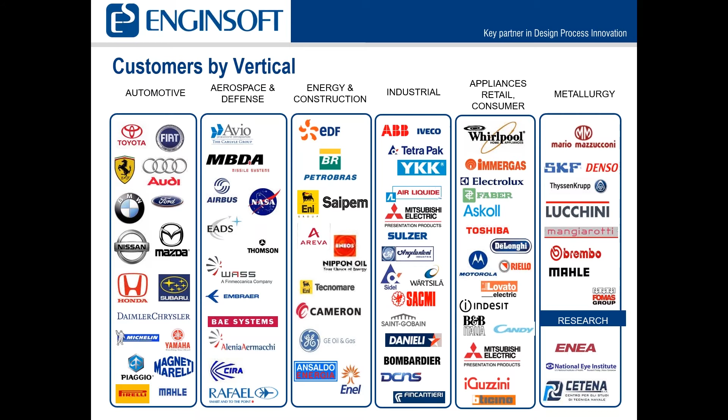So EnginSoft is an authorized reseller of Altair products. We are a reseller in the United States, but the company is a global company, and the US offices are based here in Dallas, but we have offices throughout Europe. The customers that EnginSoft typically works with are many of the company names that you will recognize throughout the world, although given the heavy focus in Europe, many of these are European-based, but quite a few of them are in the United States. You see a NASA logo on there and some others as well that are headquartered here. And this is because we focus exclusively on simulation, and this is one of the reasons that we have chosen to partner with Altair in the United States.

We do an extensive amount of consulting work. We have over 200 engineers and have completed over 4,000 projects over the 30 years that we've been in business. So there are not many areas of simulation that we are not familiar with. We do quite a bit with FEA, CFD, crash analysis, and of course, one of the leading areas that we're focused on is generative design and 3D printing.

We are, as I mentioned earlier, a software partner of Altair, but we have customers in over 1,500 locations. What that allows us to do is when we come and talk to one of our customers about a particular topic, in this case generative design, we're able to bring with us, with our engineers, expertise from where we have done work with other customers, what's worked, what hasn't.

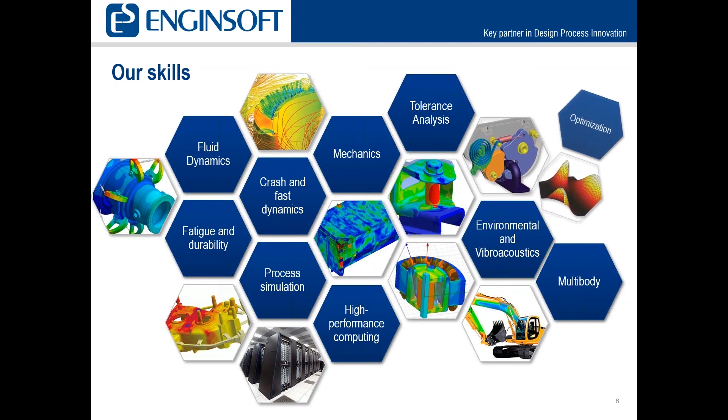So if we're going to be talking with you about the Altair products for generative design and topology optimization, we could easily reference the aerospace company in Colorado that we just helped recently, whose name I don't have permission to use, or the Department of Energy customer with Altair that we have recently done business with, or oil and gas. So it allows us to bring expertise with Altair products to specific use cases at our customer sites. Our skills are in a wide range of areas. We do quite a bit with fluid dynamics, FEA, multi-body and high-performance computing.

Okay, so about Altair and simulation-driven design for the topic of this webinar. I think Joe did a pretty good job of explaining what topology optimization is, but essentially, from my perspective, it's a series of mathematical rules, right? So it's an understanding of what mathematical rules apply to the effect that's governing the shape of the particular object, and that can be something that is intuitive, or it might be something that is completely different.

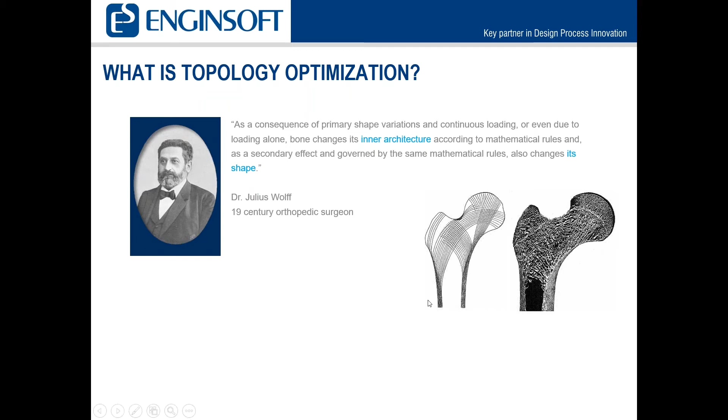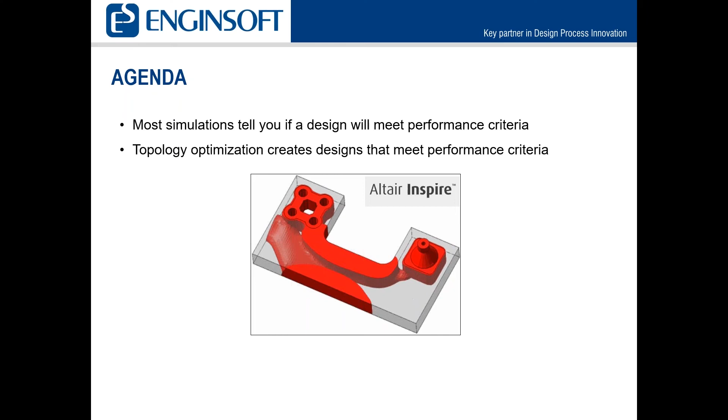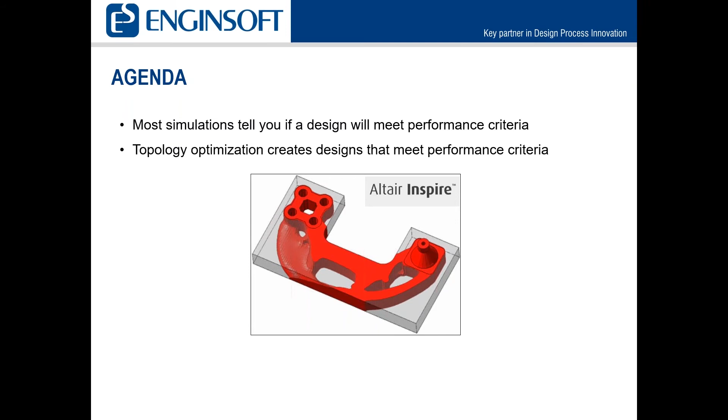So when we look at Altair Inspire, the topology optimization is really about creating designs that meet the specific performance criteria. Before, we would do a design, and then we would go test that design to see if it would meet whatever the criteria is, and we relied very heavily on the best estimate of an experienced engineer. Now, of course, the experience of an engineer is still highly valuable, but what topology optimization allows you to do is to treat the performance criteria as the primary objective and then create the shape accordingly, keeping in mind certain constraints that you may have. Okay.

Now, if you trace that back, some of you on the phone have been an engineer since the 80s and the 90s, right? And so, you did a lot with the 2D and the 3D. And of course, you were basically starting with some type of a design, and it was generally iterative from whatever your company was manufacturing. You're going to do the next version of it, and I might make a very slight change to a particular device, but I have to keep in mind my historical manufacturing methods and how I could alter that particular shape and still not impact the overall effectiveness of it.

As we got more into 3D CAD in the 2000s and 2010, we could do a lot more with the post-processing for simulation, but now we're getting into simulation-driven design. And Altair is at the leading edge of simulation-driven design. And what that means is that we are able to lead with simulation, because if you change in your thought process, I don't really care about what a product necessarily looks like unless I'm in the marketing department. What I care about is what are the functional characteristics of that product. How do I make sure that it performs the way that it should? That means I'm going to lead with simulation and then create products that meet that requirement.

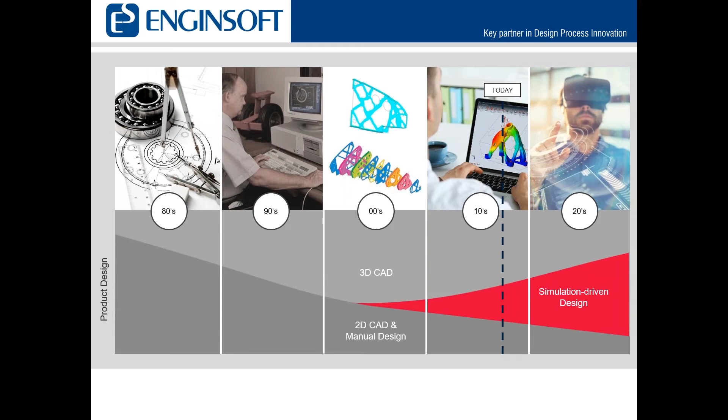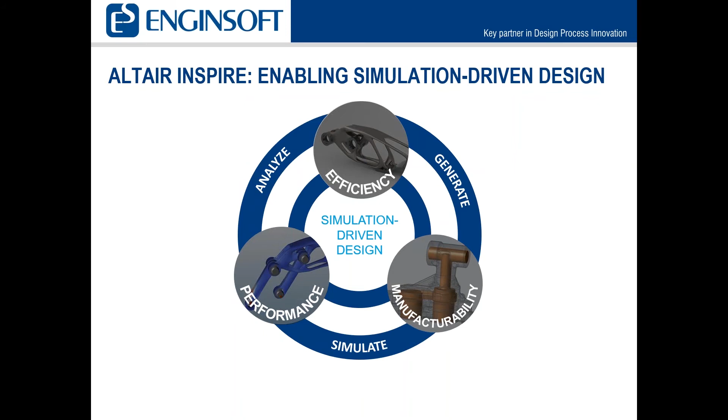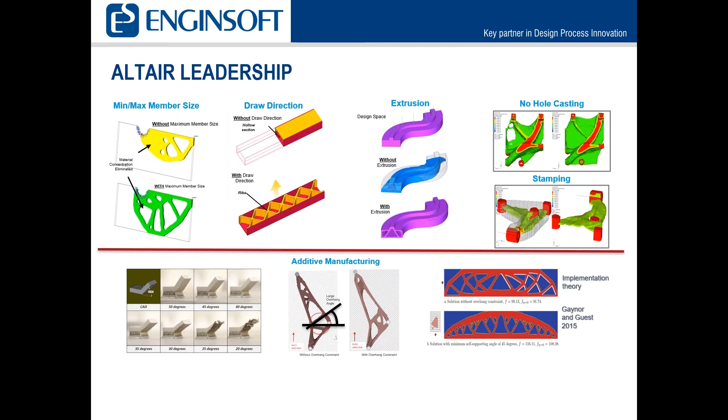So Altair has been enabling simulation-driven design as a company because they are heavily focused on the manufacturability. I know several of you that I've spoken to on the phone in preparation for this call, talking about manufacturability means that we're going to design something that we can actually manufacture, be that a 3D print, be it any of the other manufacturing techniques. Okay. Altair's leadership in the market is not just based on generative design, but also on the other product set and understanding where they're able to apply that technology. And so you've got some videos on the right showing that, okay, here's my generative design, but I'm going to take into account manufacturing methods in addition to the additive manufacturing.

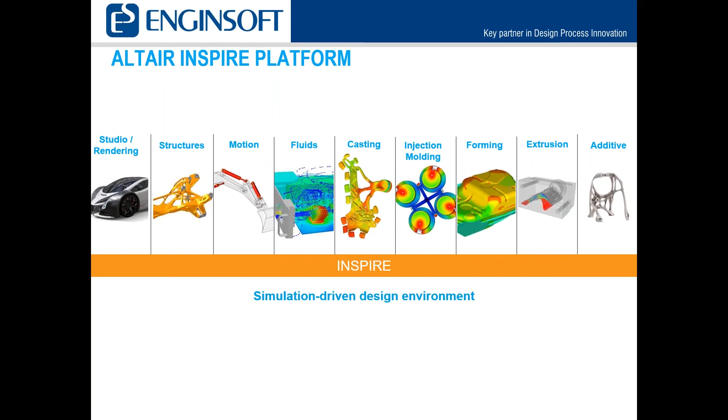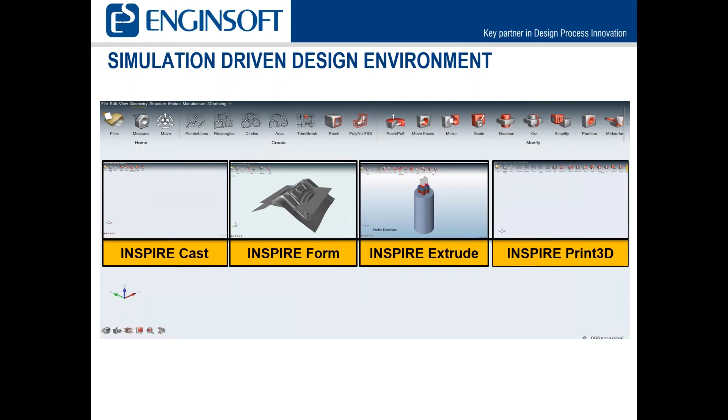But this is just one part of an overall suite of products where Altair is leading with simulation. And so we're going to allow for the other engineers on the phone to do a better job of doing a demonstration, particularly of the generative design products. But you have to keep in mind that these are part of an overall family. And that overall family, because of the licensing structure of Altair, you can have access to these other tools. For some of these people on the phone, this may be a bit unique, so I'll just go into it briefly. If you take a look at the interface with the Inspire line, you're able to access all of the different products here because the licensing model that they use is based on a unit-based license. So it's access to the suite.

Like a lot of software companies, you would just go buy one particular piece of software and you might use it for a couple of days this month and then next quarter use it for a couple of days. Think about this more in terms of you're going to get access to the suite of products and be able to have access to all of the different tools when you need them. And that's the advantage of the Altair system. I've got several people from Altair on the phone that are going to do the demonstration, so they might yell at me for this one, but think about it. Instead of buying Microsoft Excel and Microsoft Word separately, you bought the Office suite and you're using Word or Excel when you need to, right? And so I like to use that analogy here. Altair Inspire is providing a unit-based licensing that gets access to the suite, but is priced for value, okay?

And I believe that is my last slide. So with that, I am going to turn the presentation over and you guys are going to see some more details on the products in particular. Evan? Yep, I'm ready. You want to give me? Beautiful. Can everybody see my Inspire window here? Sure can. Awesome. So thanks, Joe and Chris, for the introduction.

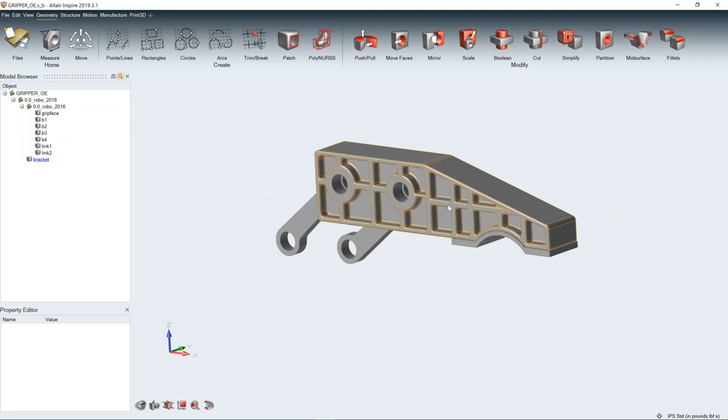So I'll go ahead and just open up a basic parasolid file, just some sort of dumb geometry, and then we'll walk through how to set this up for an optimization. You'll see here I've got a small assembly of 8 to 10 parts, something that might be a motion mechanism or something I could just simulate as a static analysis. So for the sake of this simulation, we'll just set it up as a static analysis.

And we'll want to change this shape, this piece here highlighted in yellow. This is going to be the shape that we're going to use the generative design or the topology optimization to change. So up at the top here, you'll see the structure of all of the Inspire tools, whether it's this one or any of the manufacturing tools, has this ribbon structure where I can click through different sort of workflows that are already built in for me.

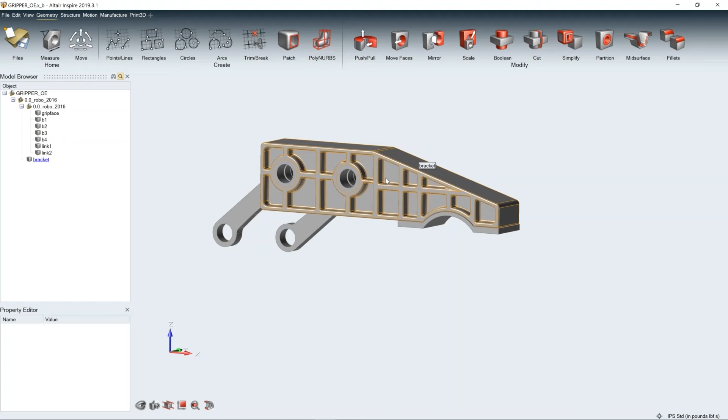So we'll start here with the geometry ribbon, and we'll start doing some simplification on this geometry to build it up for optimization. You want to give the solver an ample amount of package space, what we call design space, in Inspire to design. So I'm going to go ahead and use this simplify tool, and I want to fill in some of these holes and pockets that were cut out in this geometry. So I'll actually go ahead and isolate this part, so I'm just looking at the one that I want to simplify.

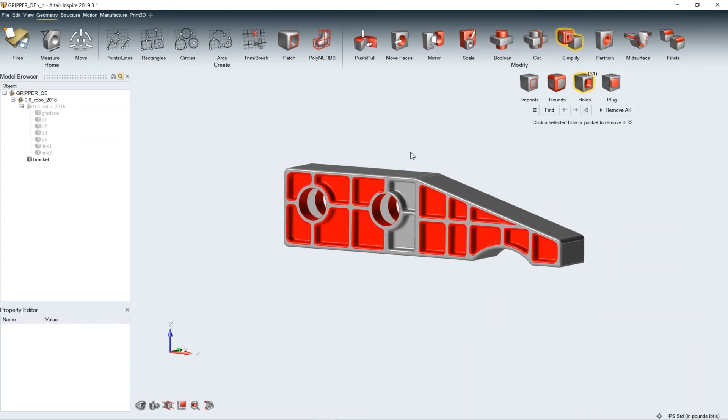And then I'm going to click holes, and it's going to automatically search for holes in this geometry that I can fill in. Inspire is really built around being intuitive and useful for designers and people that are familiar with CAD products, maybe not as familiar with analysis tools. You'll see here all the things that are highlighted in red, it'll fill in for me if I accept them, but it missed a couple of these little pockets in the middle for some reason.

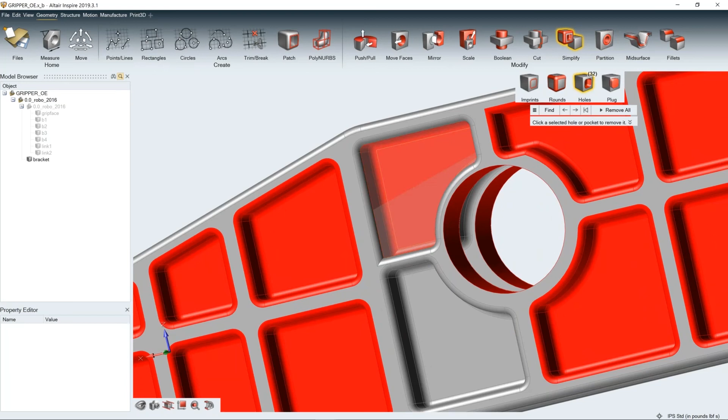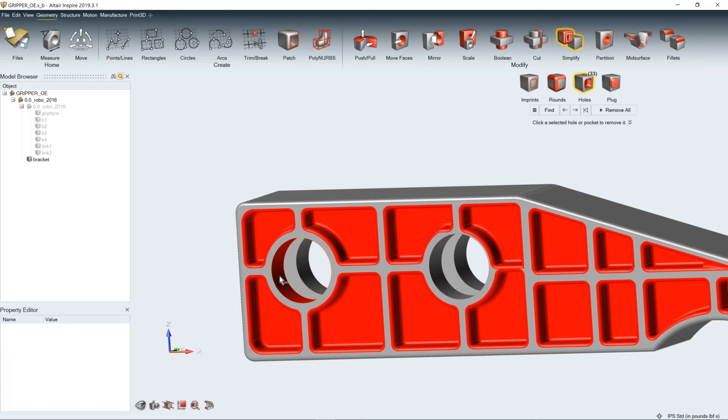So I can go ahead and just double click and grab some of those faces and fill them in on their own. And just add all the little fillets in as well. Make sure we get everything that we want to fill in and nothing that we don't. So it's really quick and intuitive just to click through and pick up the faces you want to remove. And then obviously these ones I want to keep where these bushings are. I'll just do a control select to get rid of those. So all the faces in red will get removed when I click remove all and filled in automatically.

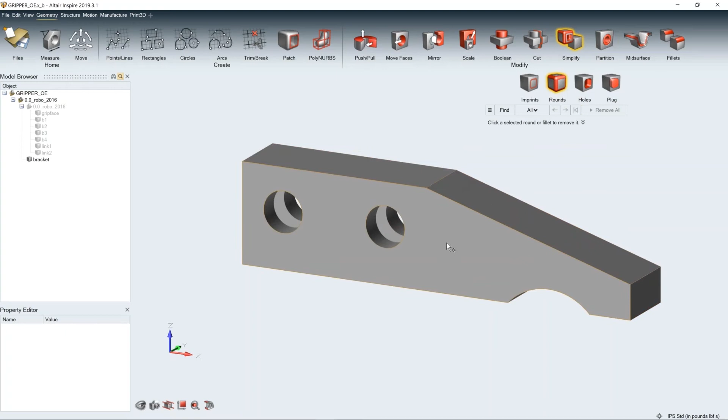Now I've got a much bigger package space, a really free design space for the optimization solver to work with. I can do the same thing with all the fillets and rounds in the model just to give square edges for a little extra space. Again, that's 2 clicks and it'll automatically remove all of the fillets. And then I could enter into a push and pull mode and maybe pull some of these faces out to give myself a little bit more geometry to work with as well while we're doing the optimization.

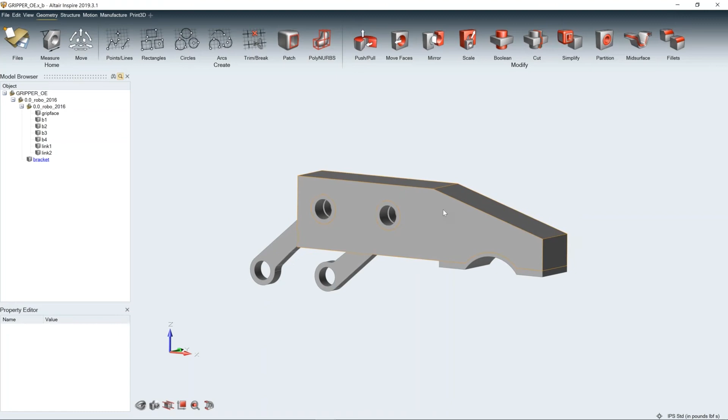So really quickly, that's the geometry tab and the workflow and some of the tools that we use pretty commonly to clean up geometry and prepare it for optimization. All I have to do is set this geometry as a design space, and it'll show up in this maroon purple color, and that's just telling the solver that that's the part I'm going to optimize when I click run. That's the geometry I want you to change.

So moving on, we'll actually set up the boundary conditions and the loads and constraints. So in the structures ribbon, everything is, again, working from left to right. So the workflow is really easy to follow and built in for you. And you'll see a lot of these tools highlight yellow in different areas as I hover over them. And that's so that we don't have to click through a bunch of menus to get to a specific tool we want. We just have to know exactly where to click. So really one click to apply a different boundary condition doesn't require me to click through a bunch of different menu files.

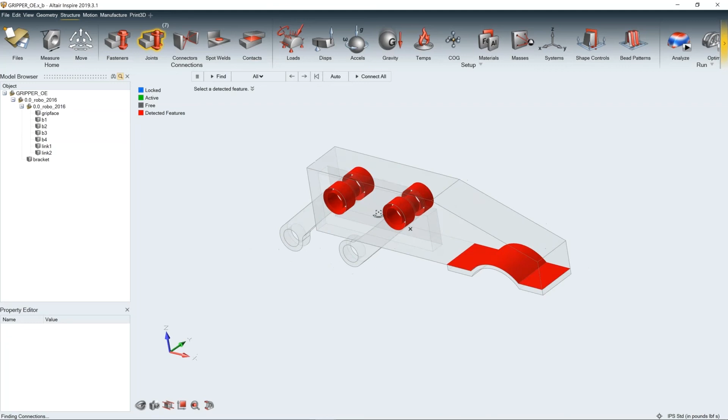So I'll go ahead and click the joints icon here because I have some joints that I want to add into this simulation. And you'll see again, it's automatically going to suggest some joints for me. And I can click to accept or I can go back and find them on my own. But what I'll do is just use the ones that it automatically finds, these concentric holes here in the middle, and automatically click to add a free pin. And I can do the same thing with this other hole. There's another free pin. I can change that condition as I see fit.

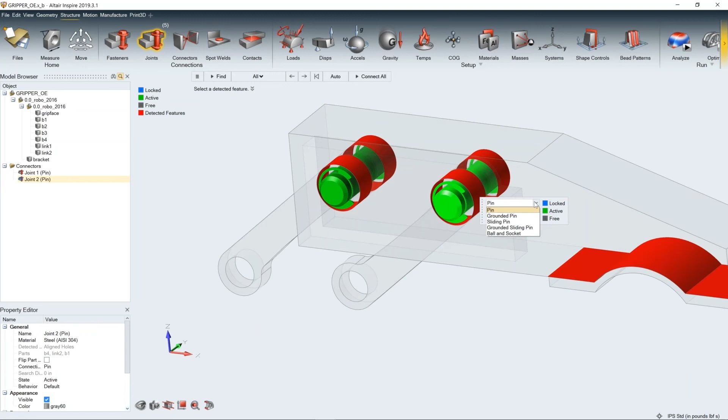I can also find my own. If it doesn't find a feature that I want to use, I can click this single hole down here at the bottom and add a grounded pin. Grounded pin will just act as a fixed point that will allow rotation, whereas these free pins are allowed to translate and rotate.

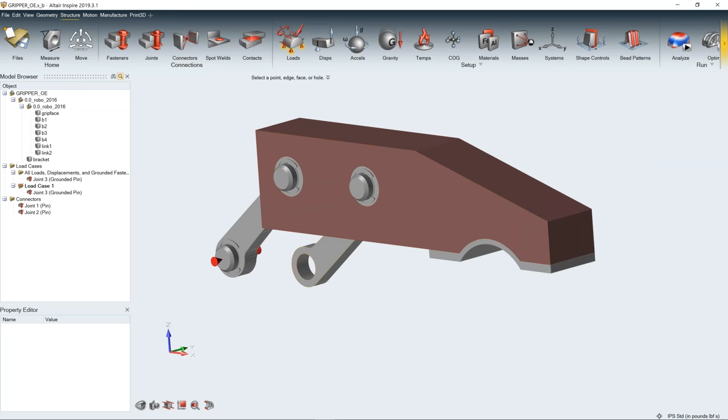I've got some boundary conditions set up. I'll go ahead and use this loads tool to apply some of my other boundary conditions that aren't joints. So I can click the apply a support icon and apply a support to any face, edge, or point on the model. And I'll just click this face here in this other joint so that we have a fully constrained model now. Now this is locked in rotation and translation, and then the other joints are allowed to rotate with the grounded pin being grounded.

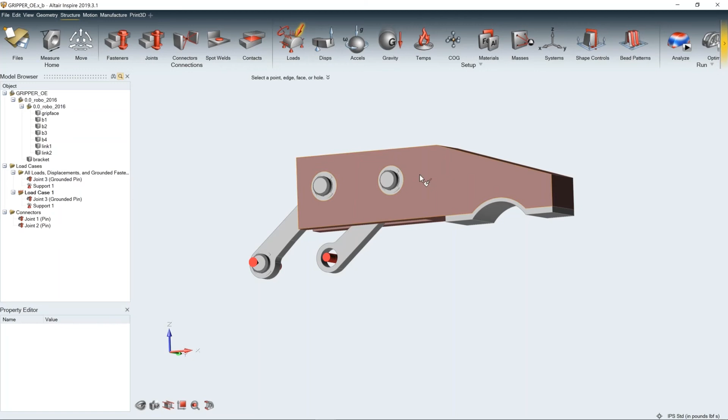Now we're ready to add some loads to actually drive the stress in the model that will drive the optimization shape. So I'll click this forces icon, which again is a part of this 4-part loads icon. I can click any face, point, or edge to add a force to, and you'll see the face that force is applied to highlighted in red. And these little micro dialogues pop up a lot in Inspire to really help you along the workflow as well.

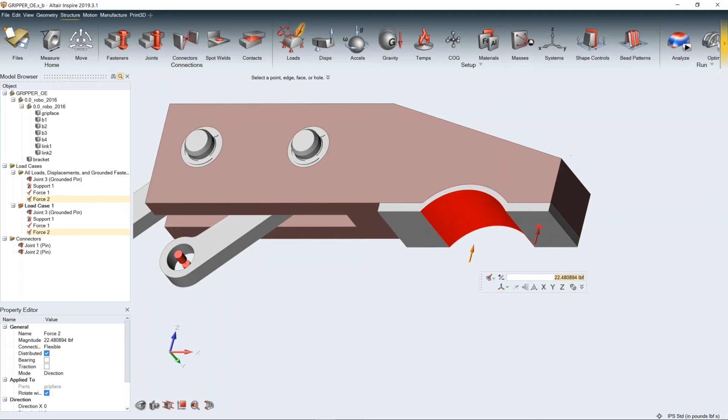So I can quickly align these with the X, Y, or Z axis, or I could even use a movable triad to rotate in a certain direction that I want. And I can really quickly type in any unit system into here, and it'll convert to pounds. If I'm not working in pounds, or I know my measurement in a different unit, I can just convert it right there. We can quickly apply loads and torques and pressures and things like that to any face, edge, or point along the model.

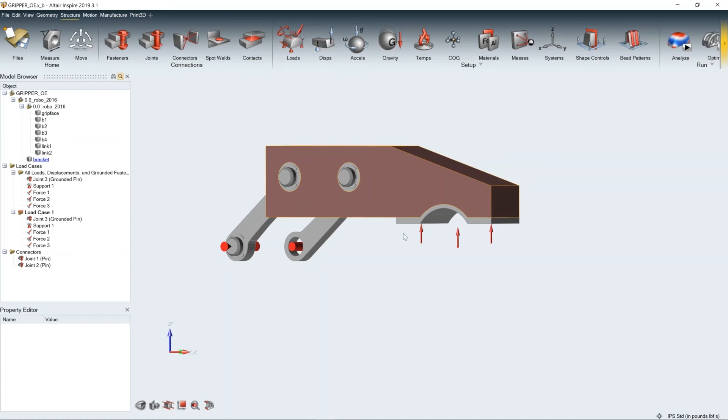Now I'm all set up with a fully constrained and a loaded model. And there's tons of different capability within this Inspire tool for how to load and constrain your model. So it's not just limited to these basic constraints that we just added. But for the sake of time, these are the easiest to show off, and I think the most intuitive.

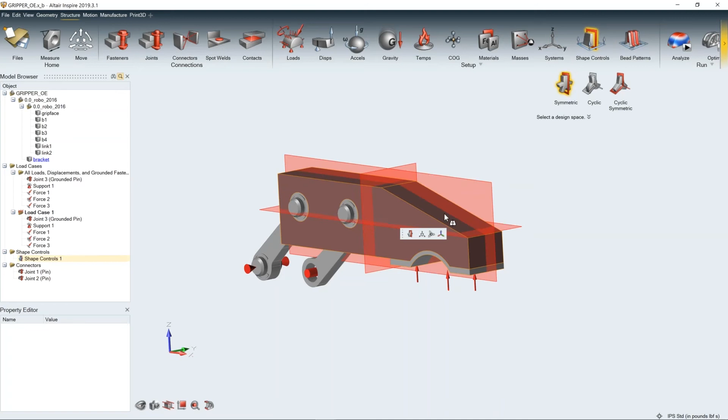One of the most important things about Inspire and its workflow for design for manufacturing is this shape controls button. So I can quickly add these shape controls to this design space. What this is going to do is actually tell the solver how I want this shape to look at the end of the run. So these are symmetry planes, for example, and I could say turn off these two because I know I want this part to be symmetric about this plane. And that'll drive the solver to make this part symmetric about that plane.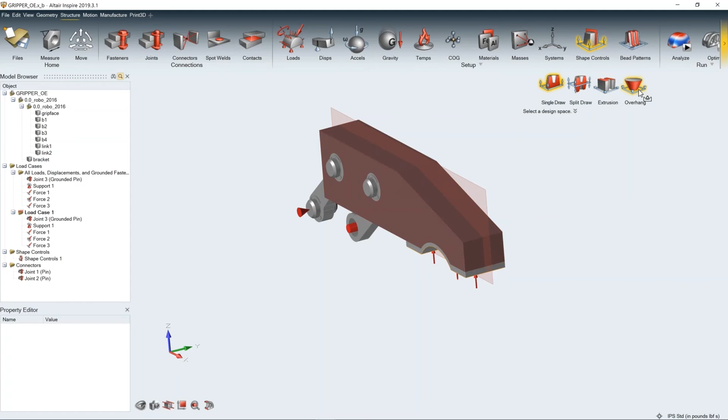Or I can use these manufacturing shape controls, to say I know how I'm going to manufacture this part, so I want you to optimize it with that in mind. And the one we'll show off here is this overhang constraint. An overhang constraint is going to say I'm going to print this part in a certain direction, and I want you to optimize the overhang angle in that direction.

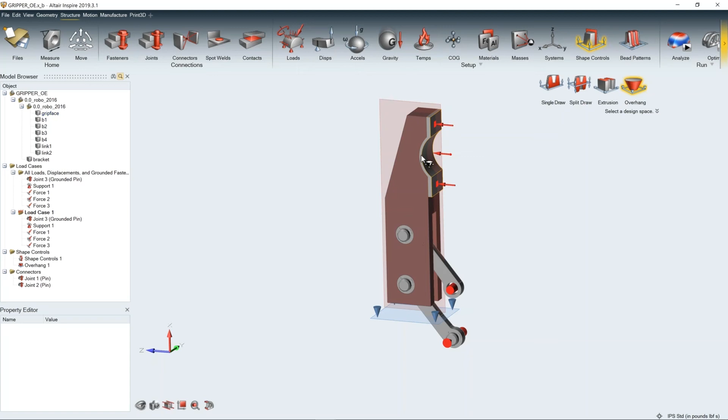So for example, if I were going to print it here in this orientation, and I know my printer can't handle anything under a 45-degree overhang angle, now the optimization is going to give me a shape that can be printed with the minimum amount of support structure in this direction. So it'll optimize for print time and support structure volume once you're done with the post cleanup at the end. And we also have these for a split draw or single draw for a casting or molding, or an extrusion as well for a two-dimensional profile.

And now we're all set up for an optimization, and we can just go over to the tool here and press run. We can set a different objective, or set a different volume we want at the end, or we can actually set a stress target as well if we want to do a minimized mass run.

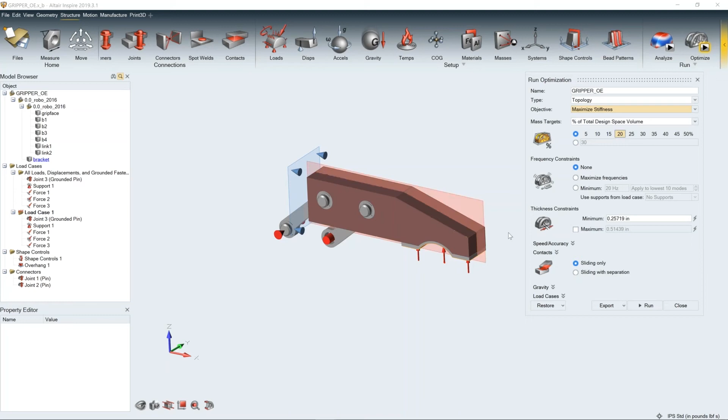So there's tons of different objectives in here, and we could talk about the different types of optimization until we're blue in the face, but for the purposes of today, what we'll run is a maximized stiffness run, which is going to give me the stiffest possible result with only 20% of the volume remaining of this purple shape. That's the run we'll take a look at in the next model, and then I'll pass it off to Sean.

So here's the result of that run we just set up. This is the exact same model, just already ran in the background, and it took about 15 or 20 minutes to finish. So you'll see here, this is what your standard topology optimization design would look like. A little bit rough around the edges, due to the process of removing elements and element densities.

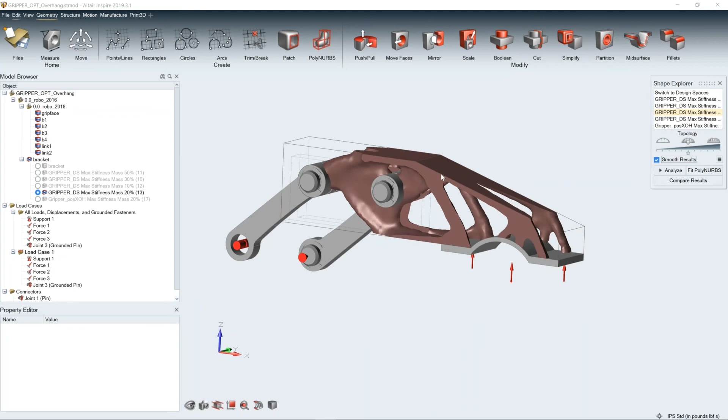But we've added some features in Inspire to smooth these shapes out so you can export them, and they look a lot cleaner. So you see there, I'm just toggling on the smooth results button. And then one of the really interesting parts about Inspire in this post-processing world is this PolyNURBS button.

PolyNURBS is going to allow us to take that transition to a detailed design from a result. So I can use the PolyNURBS tool and all of the tools underneath this taskbar to wrap this geometry in a clean solid.

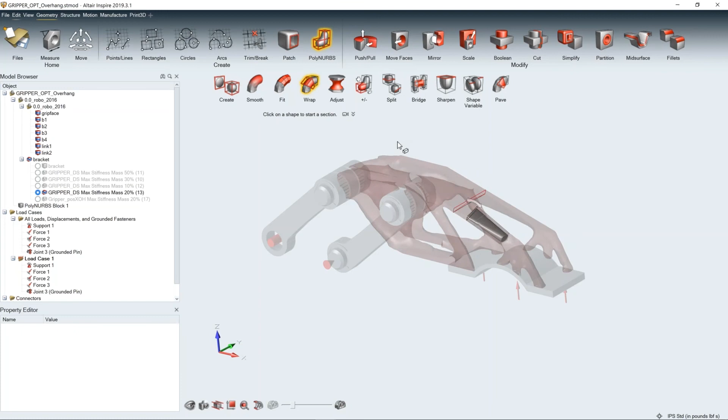For example, I can just click between faces and wrap this geometry all around, or I can build it piece by piece. I can build on top of a face in a certain direction. And I can also snap and move any point, edge, or face in this model and build it like almost a clay model.

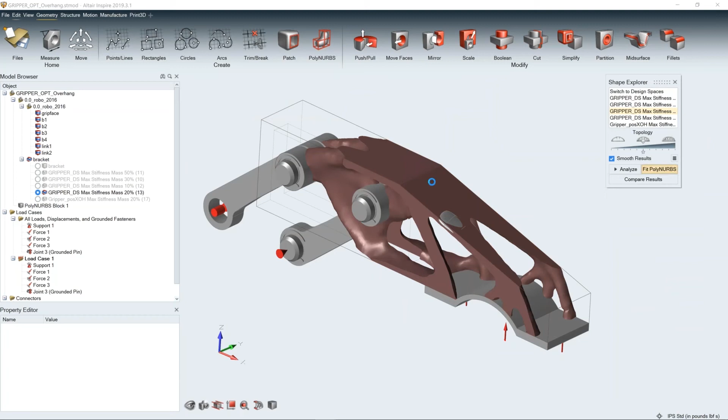But in addition to that, we've added in the new versions what we call PolyNURBS Fit, and that's going to automatically wrap this shape in a PolyNURBS. You'll see it follows the underlying geometry, so it's a little bit more broken and less smooth than if you built it on your own.

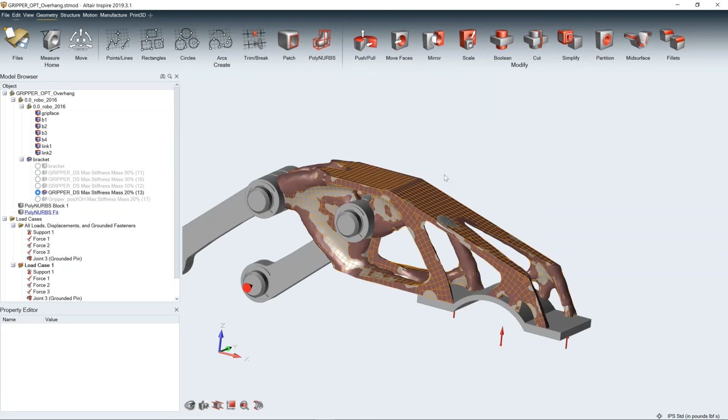But what you get out of this is a watertight solid that you can take into any other tool - it could be a print simulation, or take the Parasolid file right out into a printer to set it up for your manufacturing simulation. So you've actually got a watertight solid in 2 clicks of your optimization result, and you can do with it what you wish and edit this with our PolyNURBS tool as well.

That was a quick walkthrough of optimization and post-processing, and I'll pass this result on to Sean for 3D print simulation. All right, great. Thanks, Evan. Appreciate you going through that.

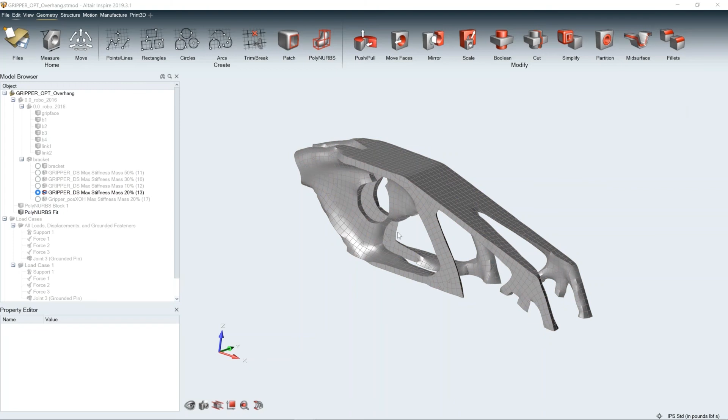While you're passing that over to Sean, there's a quick question from Corey: what import options do we have? We can import anything, any normal solid file.

Sean will show you here too. Any step file, SolidWorks file. I think the only thing we can't do is SolidWorks current model year - so like a SolidWorks 2020 file is something we can't open. That gets updated with the new releases, so the next release will support the latest version of SolidWorks. There's usually about a three month lag in the new releases to when we fully support those.

And STL? Yep, absolutely, we can bring in STLs. On top of that, you saw that wrapping capability that Evan showed - you can bring in an STL and auto PolyNURB that as well. So it's certainly something that is very beneficial for the additive manufacturing space, and I highly recommend trying it out. That's been updated in the most recent Inspire release.

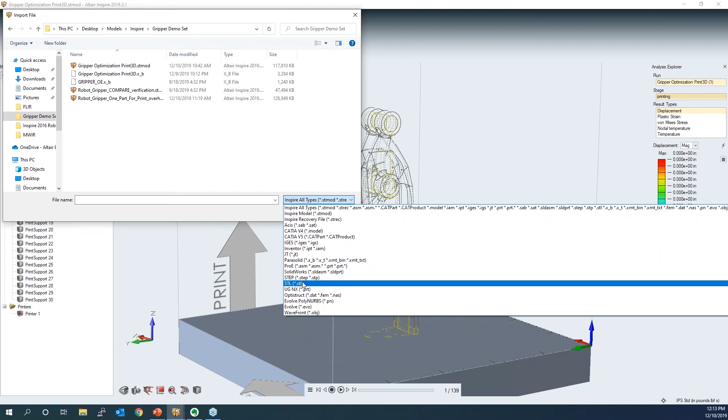So I'm going to take a second here and show you also the other brand new product called Inspire Print 3D. Picking up where Evan left off, we now want to run that through a build cycle and simulate what the build process looks like, understand what the thermal and residual stresses are, as well as any deformation that is caused from the printing process.

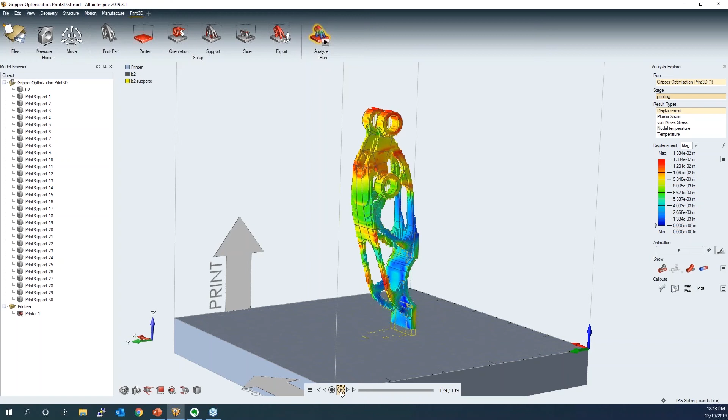So in this example here, you can see we've got that bracket. We can determine, yeah, there's a little displacement at the top. I'm going to show you how to set that up using that same workflow, working our way left to right in the Print 3D tab.

So let's start here with just the bracket, and we'll go into the Print 3D tab and just say what part are we printing. Now here I just have one part, but if you have multiple parts that you're trying to nest on a build tray, you can put in as many parts as you'd like. You specify what the material is - we have a few default materials right now for titanium, aluminum, Inconel.

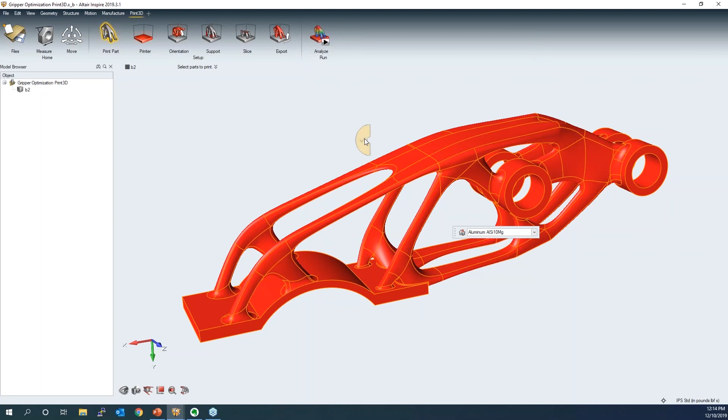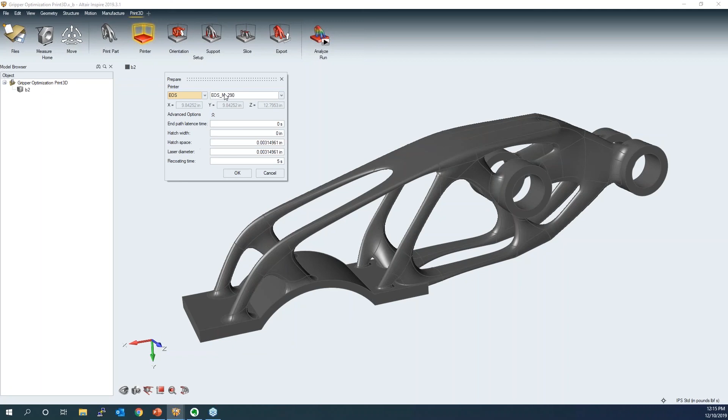And just move to the next step here, which is defining what you're printing this on. So the default printers that we have are EOS's M 290, the 400, the 400-4. We've got Renishaw machines in here and SLM machines. If you're using other machines, let us know - we can certainly help you get those set up. But that's all defining hatch widthing, spacing, the diameter of the laser, recoat time, and so forth.

So when you've selected the printer, it knows what the print dimensions are, and it automatically tries to put that part right there on the build tray for you. So we're going to the third step here in the process, which is to orient this part.

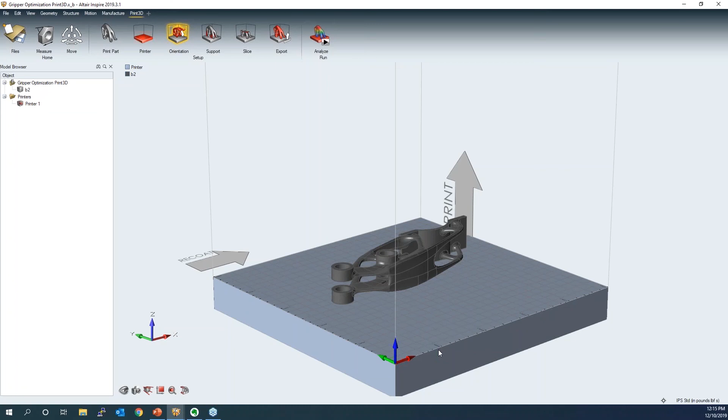When we orient a part, this is going to identify where the support materials are going to be and help us identify the best way to place this on the build tray to create a design using as little support material as possible, as well as understanding what the print time may be.

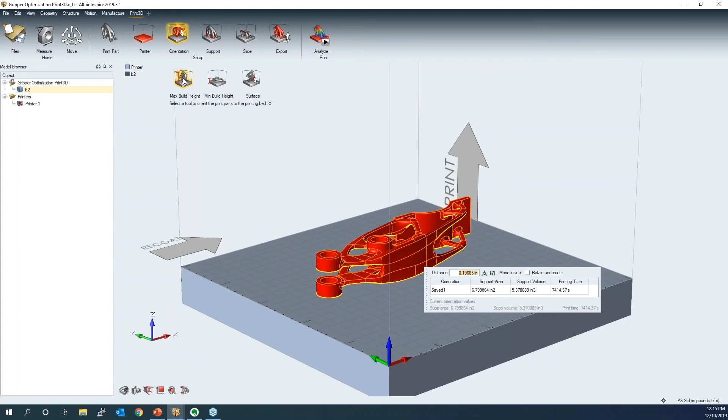You can see this box pops up here, and I can save this initial position, and it's going to tell me what the support area is, the volume of that support, and the estimated print time. I could select max build height, and it reorients it, figures out the maximum build height, and updates that. You can see the overall support area has decreased, but the volume of the supports has gone up, and the print time has increased as well.

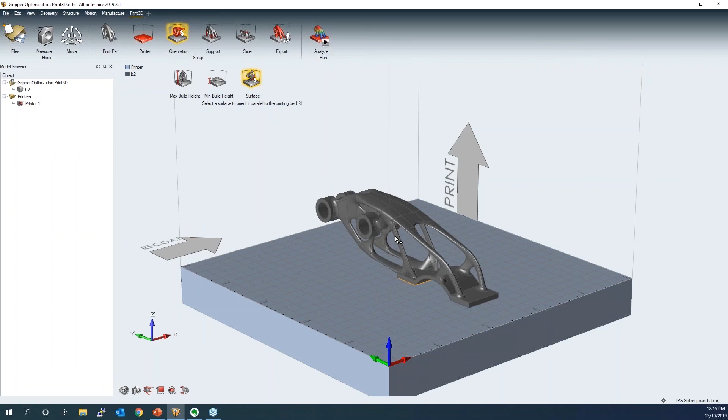Or I can just specify a surface that I want to orient it to. So I could say I'd like that to be the surface, and again, once it comes back with the results, it will identify the undercuts and show me what the support area is, volume, and so forth. I can click back into any of these to return to that previous orientation.

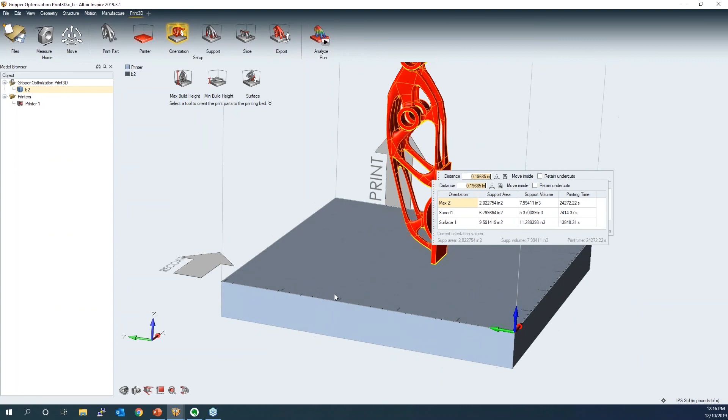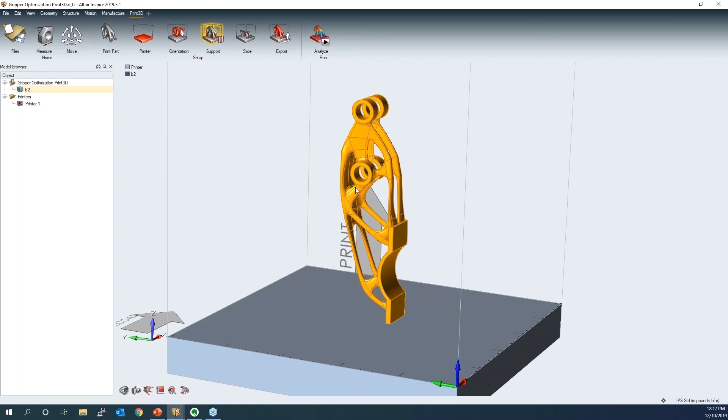Let's say we want to use this max build height as our default printing method. So I'm going to accept that, and I'll move over to the fourth step here, which is to actually generate the supports. This takes a couple seconds to do, but what it's doing behind the scenes is calculating where all those undercuts were, and then it automatically creates the supports for you, and then you'll be able to modify and adjust those supports as needed.

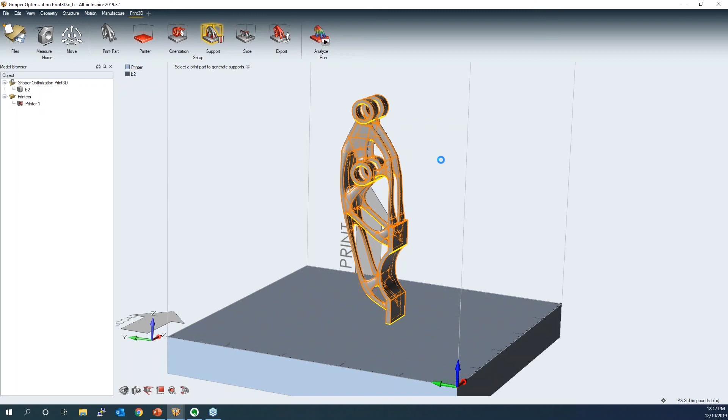It does take a second because it's creating a bunch of geometry in the background, but it'll allow you to specify the types of supports you want to use, as well as how those supports are connected to the actual part.

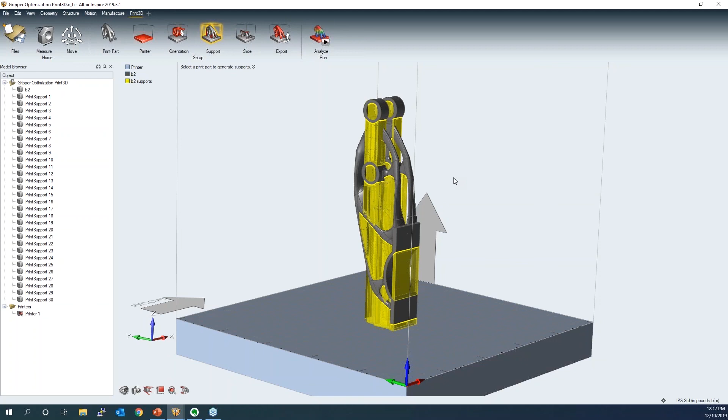Here you can see it's come back with the supports, and I can now make modifications to any of these supports. One of the biggest advantages of Inspire Print 3D is that these supports are tied to the underlying geometry. So I could always go back earlier in the process, make modifications to those PolyNURBS designs, and the supports will automatically update based on the changes to the design. So it's a complete workflow, completely connected.

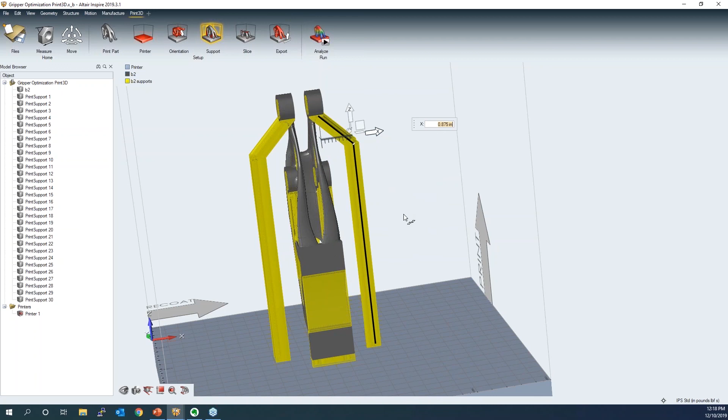Let's say, for example, I want to move this support and make it more of a tree support. I can simply come over and move this. It automatically keeps my build angle. So let's go to the other one over here, and say I want to move that one out as well. And maybe turn this into more of a pin support instead of a solid support.

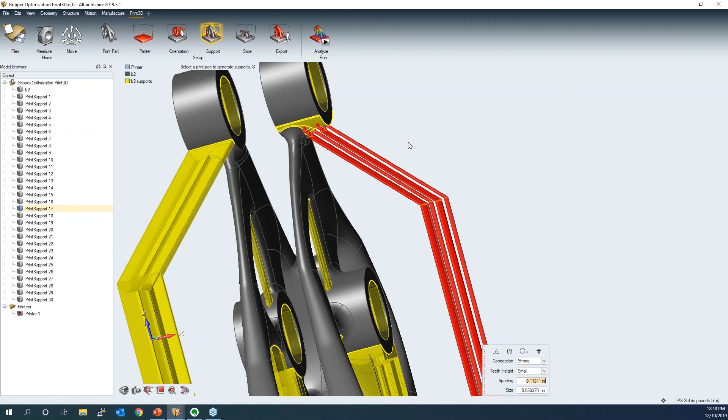You can see here we specify what type of connection, and that's defining, on the teeth, how tight of a connection it has. So if I change that from weak to strong, you can see that has increased the teeth size. You can specify the spacing, the sizing, and do this for pretty much any of the supports you want to simulate.

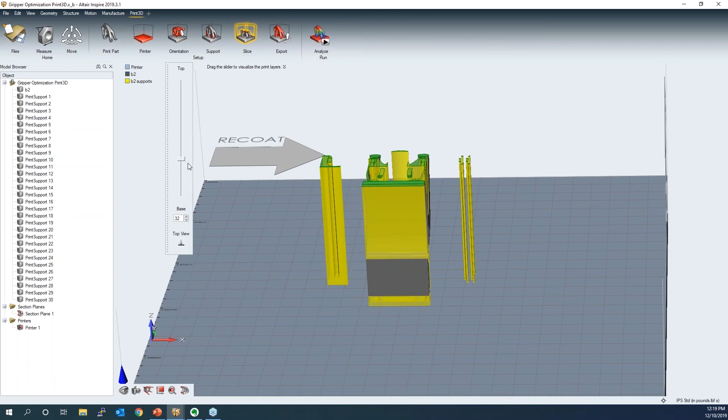So at that point, once you've got your supports defined, you can come in and look through the slices layer by layer. As I scroll from the bottom to the top, I can look at any of these layers as I'm going through here.

And then I can export that as an STL file. In the next release, we do expect to support the CLI format as well as other 3D print formats in the future. Right now, we write out the STL for the part as well as the 3D supports.

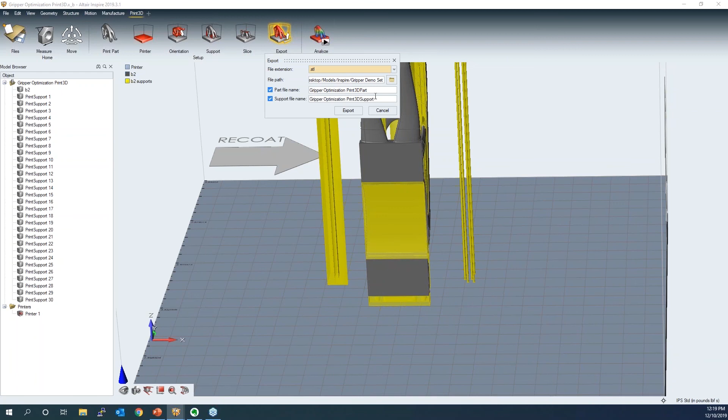And then we want to simulate that. When we simulate this, we're doing a full thermal mechanical simulation. We can do it by layer. We know the velocities, the powder thicknesses. You can specify all these printer parameters. It comes up with the default print for you. And then you can either specify whether you want a more accurate simulation—it'll take much longer, have a finer resolution—or a faster simulation. And then just select run.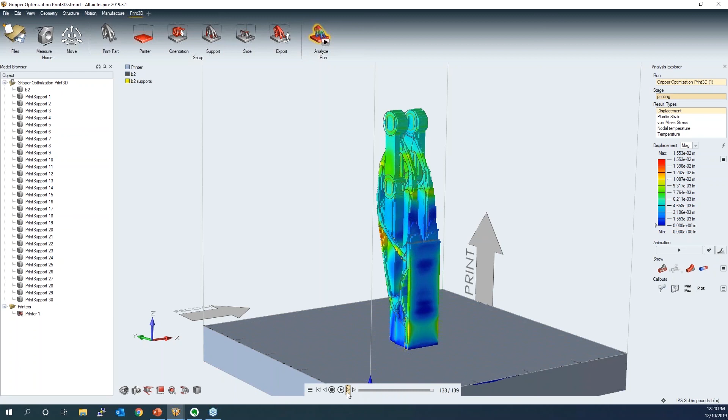And then in the last 2 frames, we're going to actually remove the supports. So the supports were removed in that frame. And then in the next 2 frames, it springs back. So in the last frame, we actually see what the spring back is after all the supports have been removed and it's off the build tray. And we can see the amount of deformation and where it's deformed.

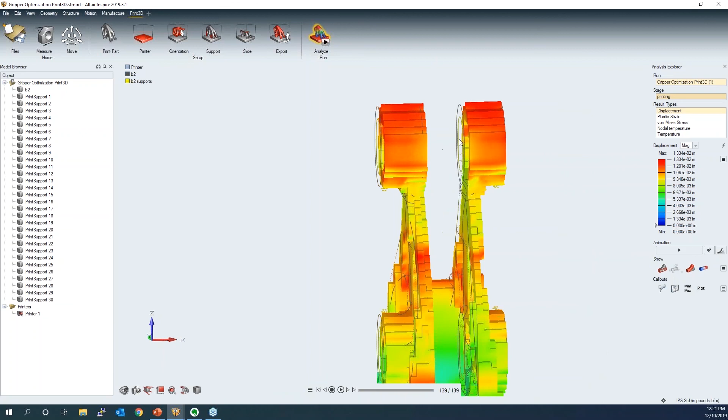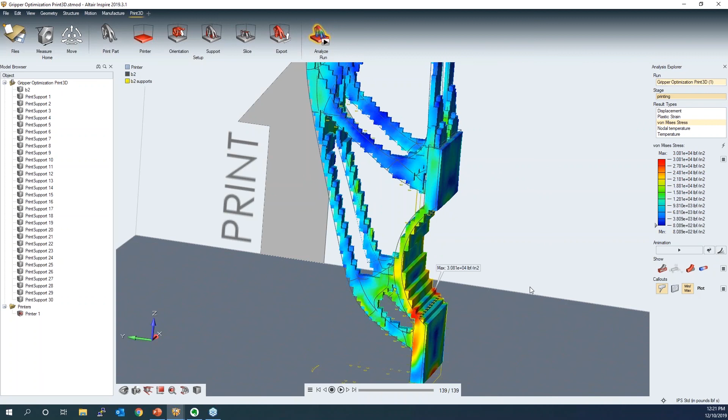We can also look at things like plastic strain, von Mises stress, so understanding where the stresses are in this component after printing. We can put on callouts to understand what the hot spots might look like, where our min and max are, and we can show that min and max while it actually prints, so as it's changing.

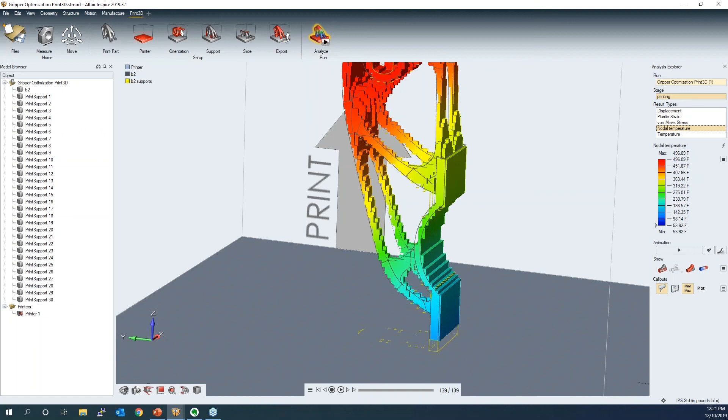Look at nodal temperatures. So understand all sorts of information about the print process.

And if you have too much deformation, it's very easy to go back and make changes to either the support mechanism, the orientation, or the design itself to get to a good part before you actually put it in your machine. If you simply eliminate making one mistake on a design, you've paid for the software itself.

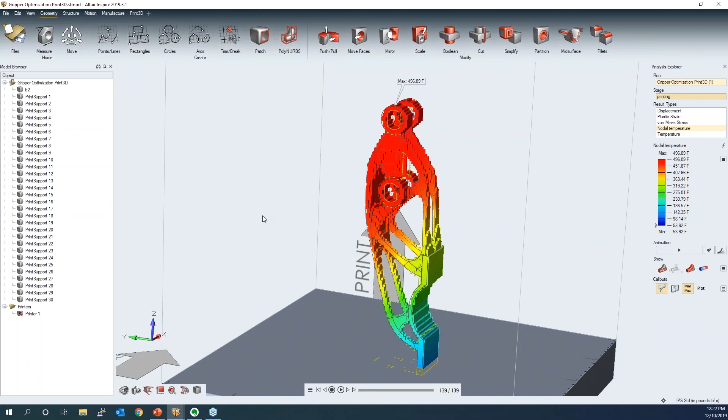And as Chris pointed out earlier, this product is fully integrated, so you can do the optimization, the structural analysis, the motion, as well as the simulating of the 3D printing. So with that, I'm going to pass it over to Chris to wrap up the session today and take any questions.